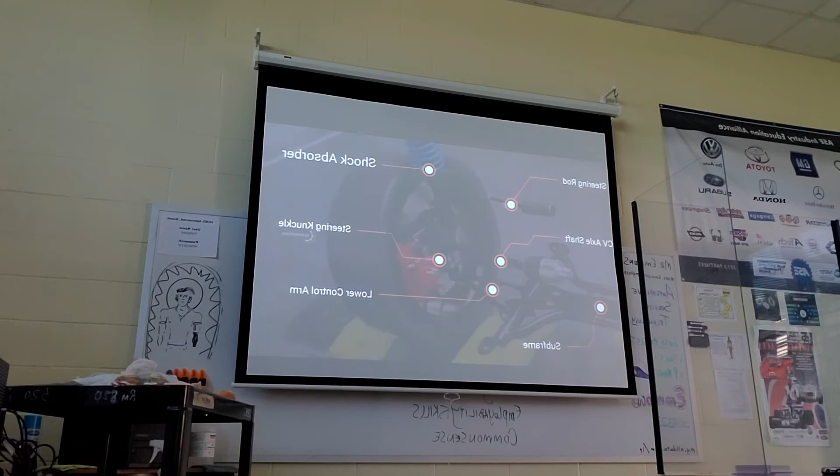When it comes to the performance of an automobile, people usually think of horsepower or the cubic capacity of an engine. But all the power delivered to the powertrain could be wasted if not handled by an efficient suspension system. The shock absorber, also known as a damper, plays a vital role in the suspension system.

All right, so you guys recognized all those parts we just talked about, right? Yes, sir. Okay. I'm going to switch this around. Looks like it's going pretty well, so. All right, hopefully that'll work.

What I want you to focus in on in this part of the video is just identify all the components that are on the bench that we've been learning about, seeing on cars. How do they work together with each other, right? So it's kind of like a brother-sister family relationship when you're talking about control arm, ball joint, knuckle, ball joint, lower control arm, or strut. Everybody's connected, right? It's like that old saying, the knee bone is connected to the, well, femur, I guess, right? All right, let's keep going.

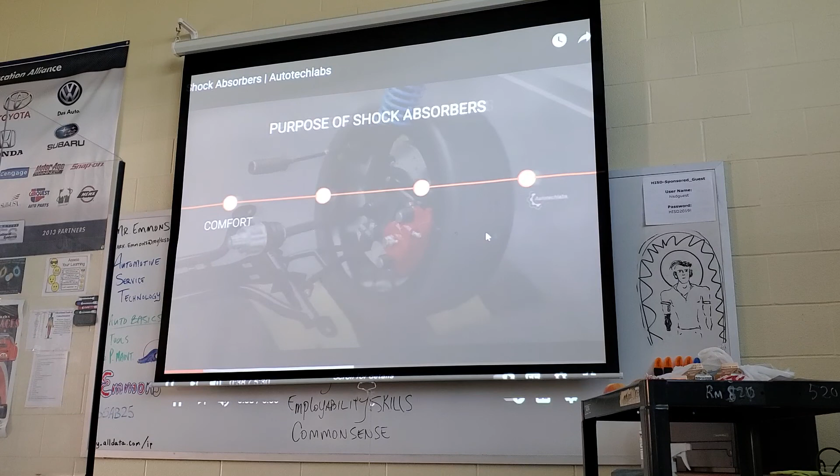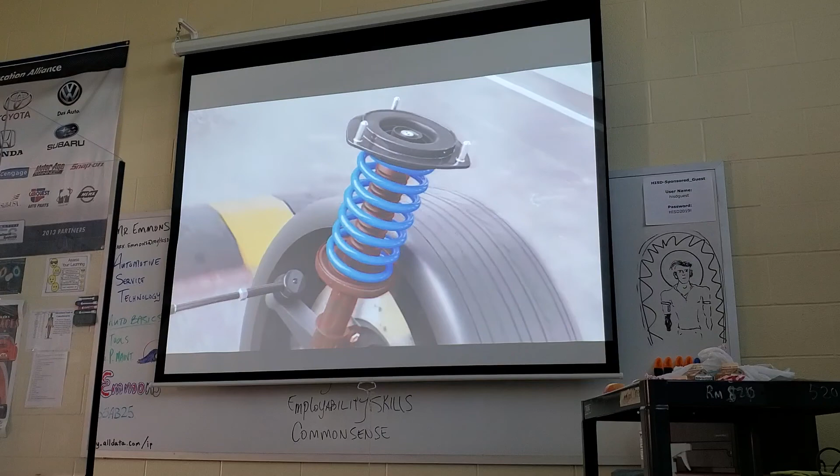Not just for providing better comfort, but it also ensures consistent traction to the road surface, better steering stability, and also improves handling of the vehicle. Technically briefing, a shock absorber is nothing but a hydraulic pump which absorbs the kinetic energy of the suspension system and dissipates it into the atmosphere as heat. Shock absorbers found in most vehicles can be strut type or conventional telescopic type.

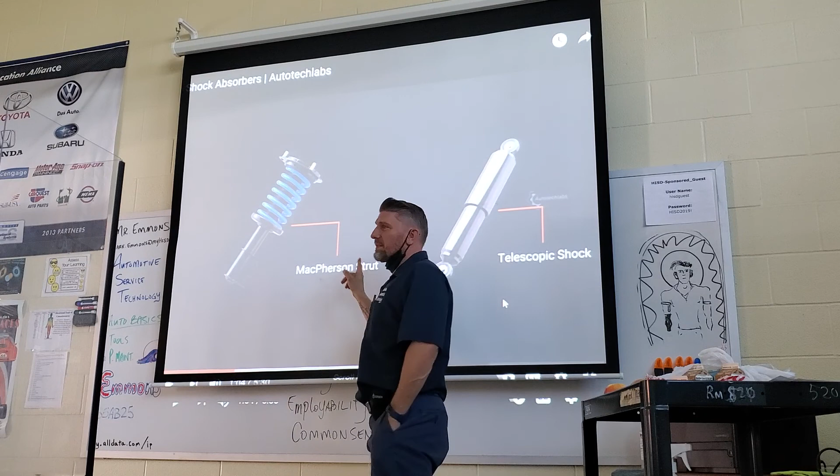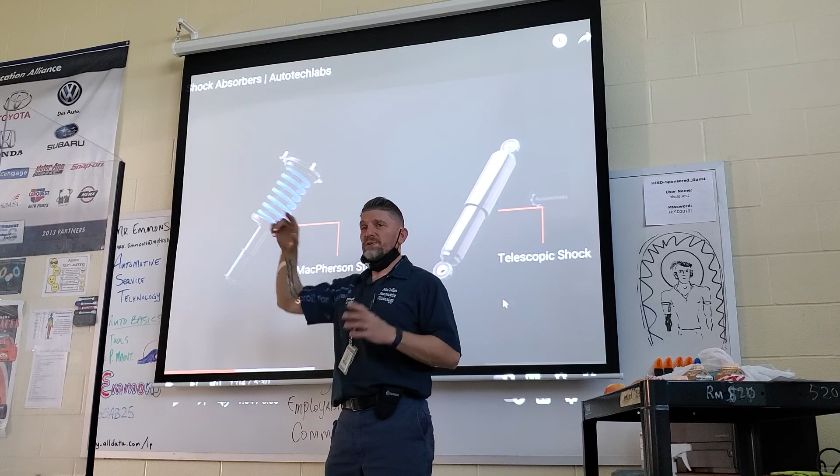All right, so just a little note here. I know that in the past we keep saying that this is a what? I've called it a strut probably 100 times with y'all. And it's on the parts list as a strut, right? It's actually called a MacPherson strut because if you remember, we had cars that were heavy, and we got underneath that Olds Cutlass the other day. We saw the full frame matches what a truck has now. We just figured out, well, we need to lighten these cars up if we want to get better gas mileage. And so front-wheel drive was born, unibody construction was born, and a lot less frame was needed.

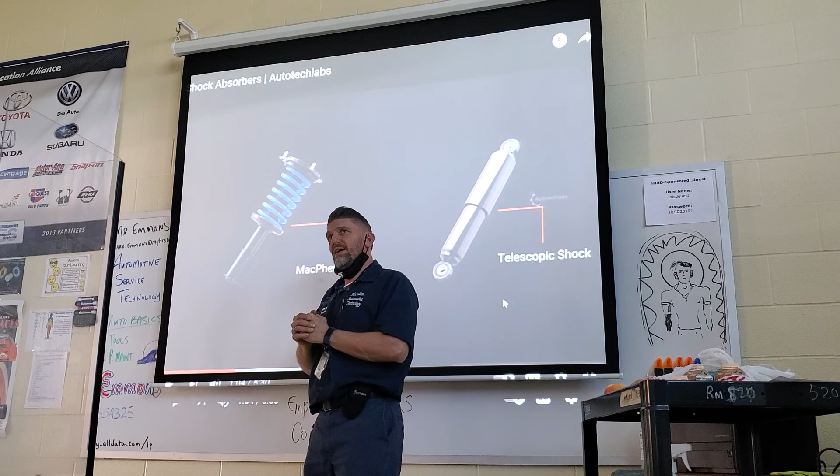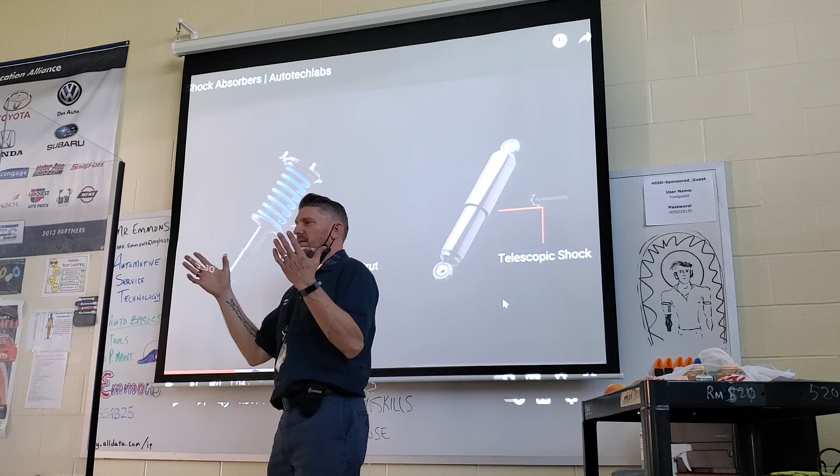But they had to figure out, again, this is probably the third time we've covered this, how am I going to run twisting force or torque to the wheel and get power to the road while there's a spring, as you saw on the Olds Cutlass, and a shock in the way. So the guy, MacPherson, decided, let's move the spring and shock up. Does the same thing, and as you can see by the illustration, the wheel was going up and down, it does exactly what the old style used to do. Now we can run a CV axle through that area that's capable of taking twisting force from the car, transmission and differential, and sending it out to the wheel.

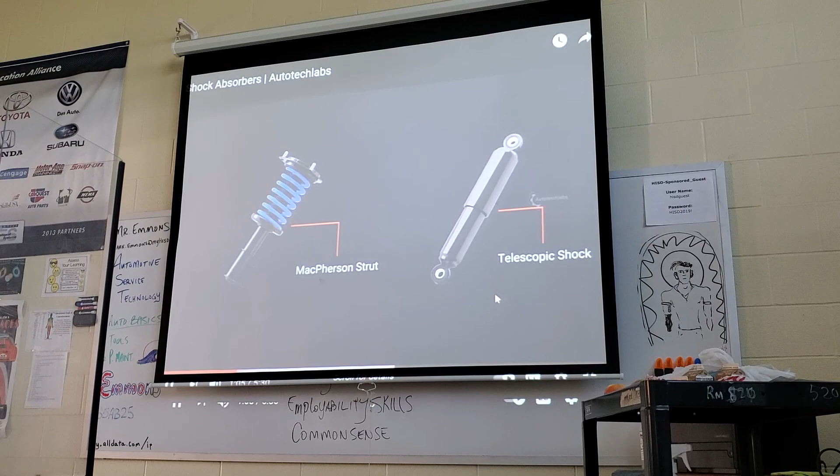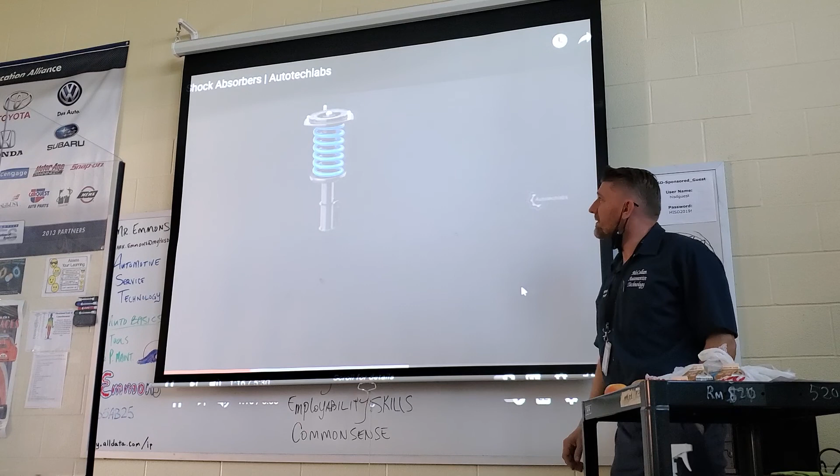Although the operating principles of both are almost the same, in this presentation, we're going to take a look at the strut type shock absorber, mostly found in the front suspension of an automobile. A strut type shock absorber is mounted between the body and the steering knuckle, with the steering knuckle connected to the lower arm.

Please look at this and understand it. Like, I need you to know subframe, lower control arm, knuckle, right? Knuckle. Strut. Or on a truck, it would be an upper A arm with a spring over here or over here. It depends. Some trucks use a strut, my truck uses what? Remember? Hello? You don't remember the spring that's used on my truck? Oh, leaf springs. In the rear, and what in the front? Rhymes with torso.

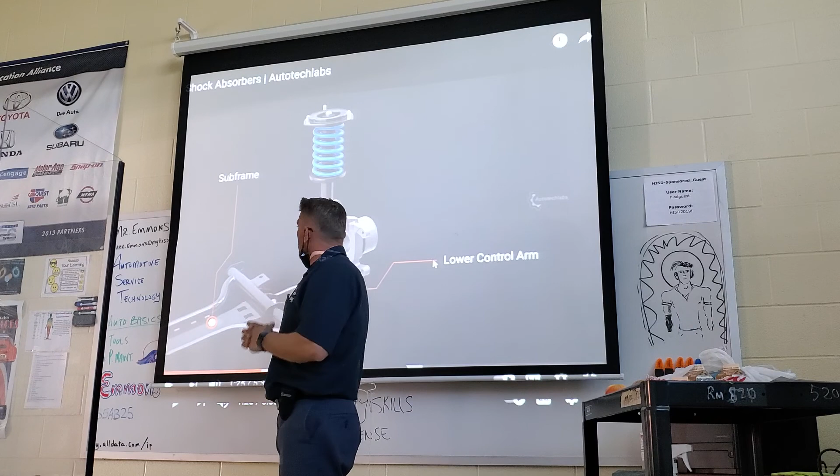Torsion bar. Very good. So at this point, we're actually going from looking at all these parts on a bench to how do they work together? How do they work at all? Like what's the function of each individual part if they were all laid on the ground and we discussed them? And how do they work together? And then what are the different types that are used and why, right?

So you wouldn't use a subframe with a strut on a truck. And I think some of you in this room could probably tell me why that's a bad idea. And you wouldn't use a leaf spring on the front as the type of spring for a suspension system. And I think some of you could probably begin to tell me why.

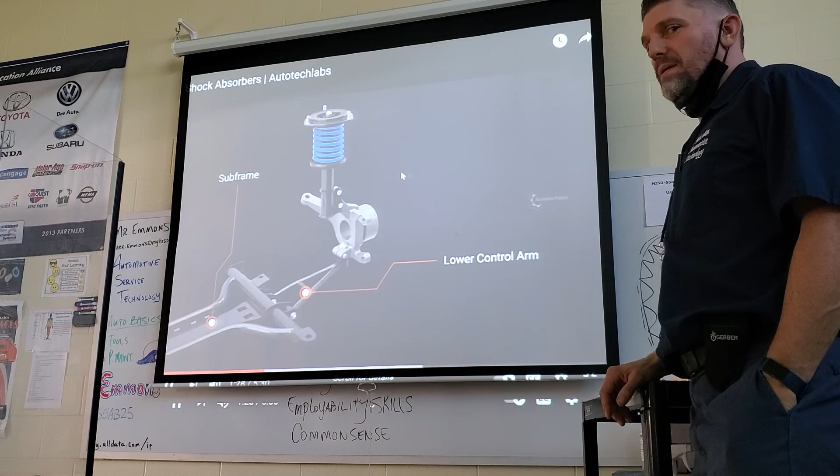What's this component right here? It's called an axle, okay? Just while we're here, I'm going to cover this, get a little advanced. This is more Auto 1-ish, but this is a steel shaft that's splined, and splines are when they take the end of the shaft and they cut straight grooves in it, and then they take a female exact copy and they slide it on, and then the two are locked forever. Yes, they slide apart, but

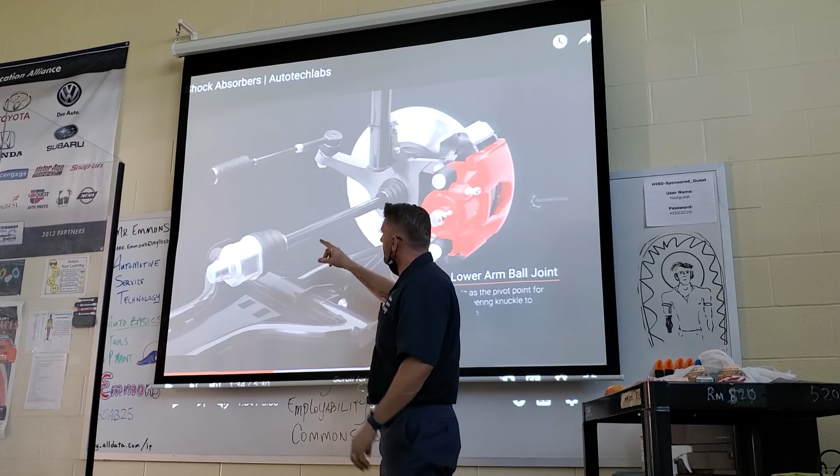this rubber corrugated boot that has these sort of expanding pyramids, inside there is a tricky system of a cage with balls and a series of ball runners that are like water slides, and it can twist and turn. It's wicked. I mean, this invention is amazing. And then this one is called a plunging joint, because all it does is a tripod. You might even be able to see 1, 2, 3, a tripod of steel circles that are in a sliding channel.

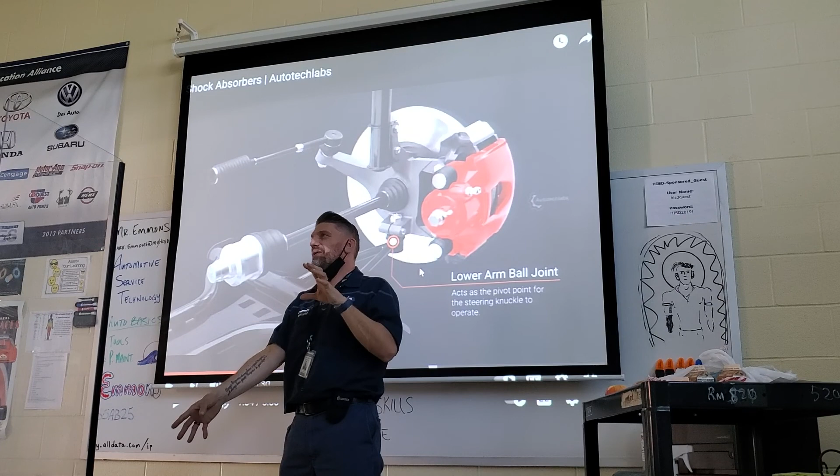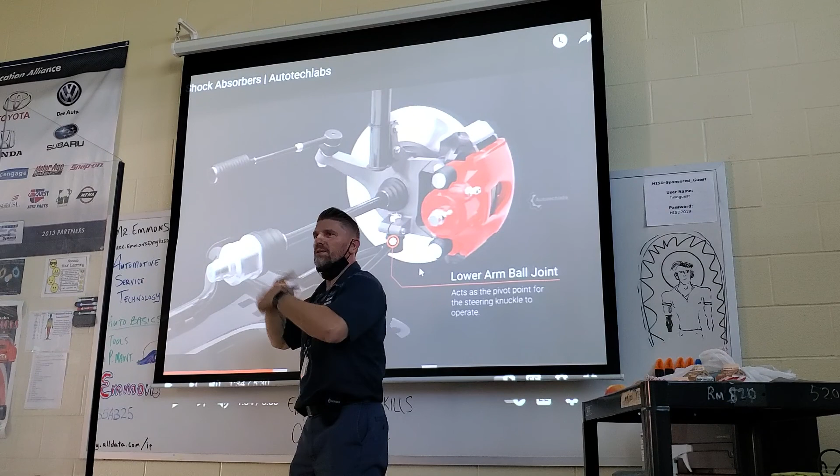So 1, 2, 3, and they can pass rotational motion or torque while the shaft goes down and up as the suspension moves, causing this to slide out and back in. So when the suspension falls into a pothole, the CV axle has to get longer, right? So inside the plunging joint, it has the ability to move forward and backward and still continue to twist and put power into that shaft, which puts power into that joint, which puts power into the wheel, because the splining I talked about earlier is happening in the hub.

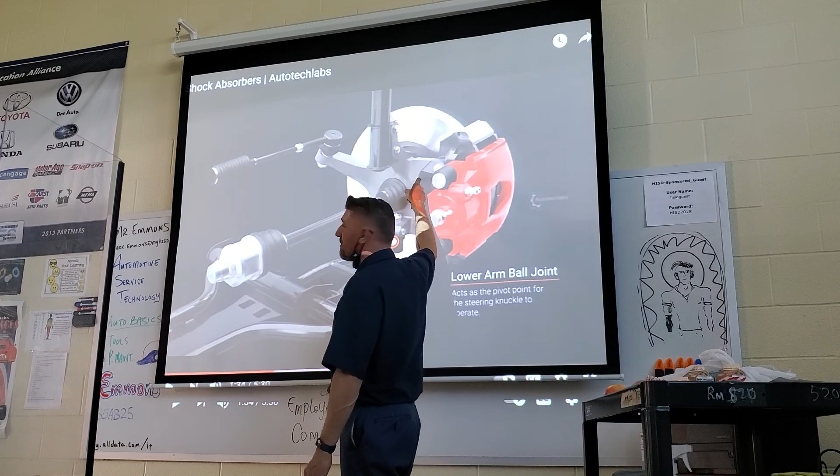So you remember the hub on the bench out there? A front-wheel drive hub is splined on the inside. So the CV axle, the part you can't see that has a stub shaft, splines into the hub, and then whatever the CV axle does, the hub is doing, because they're splined forever, right? I've never seen one of these break anywhere but right at that joint and right at that joint. Those are the weak spots. You're never going to see one of these shafts break or the splines on the tip of the axle, okay?

These are called drive axles. They're also called drive shafts, and they're also called CV axles. CV stands for constant velocity, meaning that it's capable of transferring velocity constantly, right? So we just kind of hit Auto 1 and maybe stepped a little into Auto 2 and then came back. Just a lot of information. That's not an Auto Basics conversation we just had. So if you feel like your brain's full or you're getting tired, it's probably because there's a lot of information coming your way.

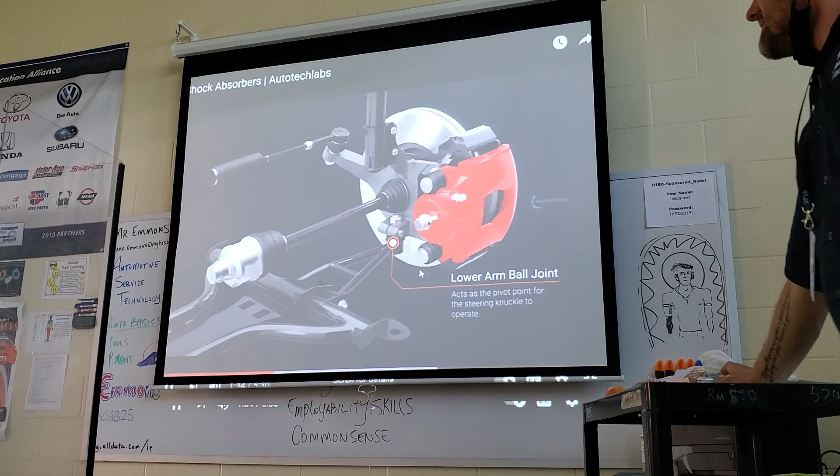All right, here we go. By the steering rack assembly. Oh, by the way, how many people have seen the ball joints video that I posted? Goss's Garage? He's good. It's pretty good. I don't have time to do a video, right? And this guy is talking about it, and you get the point, right? You understand what a ball joint probably is and how it differs from a strut.

So just so you know, wherever we need to connect a control arm to a knuckle, there has to be a ball joint, because it has to be able to move up and down, and the angle right here is not going to stay a right angle forever. It's going to do a lot of this. So it has to pivot, and it also has to turn when you turn left and right. So when this turns and goes up and down at the same time, the ball joint is taking care of all that. High wear component. This is where your money is at. You're going to replace more ball joints than any other component.

And it's a ball socket arrangement; you've seen them on the bench. You have this giant cup, and it surrounds a steel ball that's on a shaft, and that thing can move around like that. Imagine what's happening in there, right? And when the grease runs out over time, 100,000 miles or 10 years, it wears out, and all of a sudden you've got some wear in there.

Now it's the same as when you have a hip socket problem and someone has their hip replaced. It's a ball socket arrangement. The femur bone comes up into one of these, right? And so when you step on it and it goes kunk, and there's nerve endings in the way, that hurts like hell. So it's the same arrangement though. Any questions?

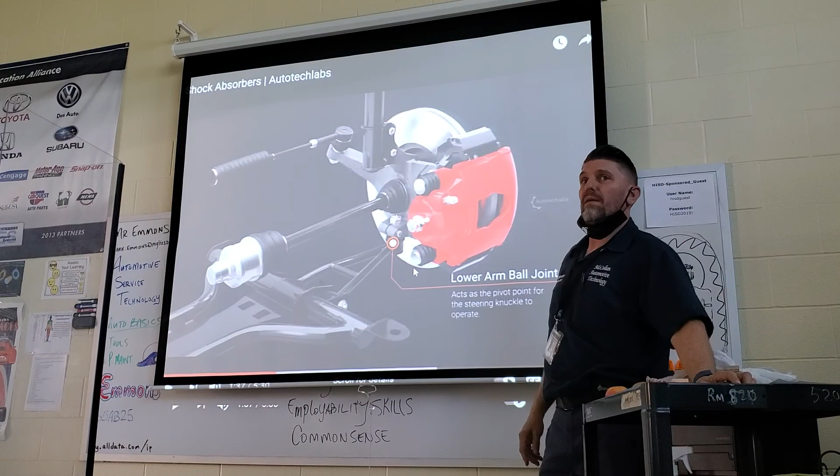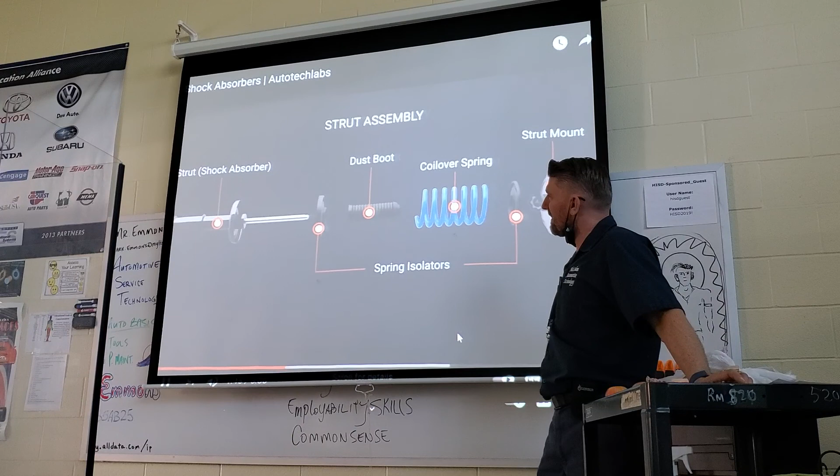All right. A strut assembly comprises a shock absorber, coilover spring, top strut mount, and a dust boot over the piston rod to prevent any contamination to the oil seals. Despite the popular belief, it's the coilover that does take the weight of the vehicle and not the shock absorber.

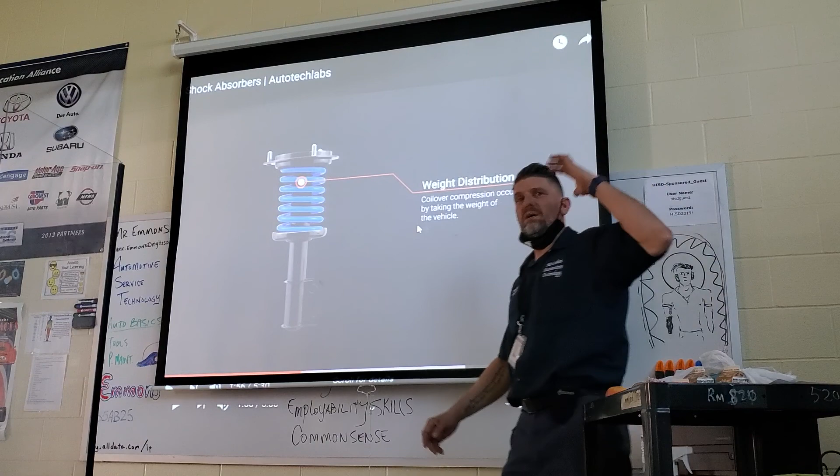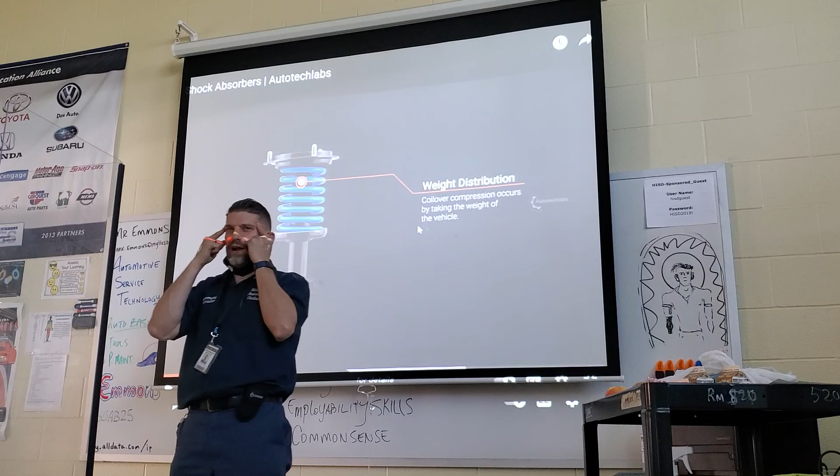Boom! Fun fact. Springs control the weight of the car. They handle the weight of the car. Nothing else. Okay? I need you to put that so far in your brain that it sprouts like a small seed and then begins to blossom when spring comes. Okay? The springs hold the whole car. You ever seen a car that's sagging one side, the other, or back and front? It's the springs.

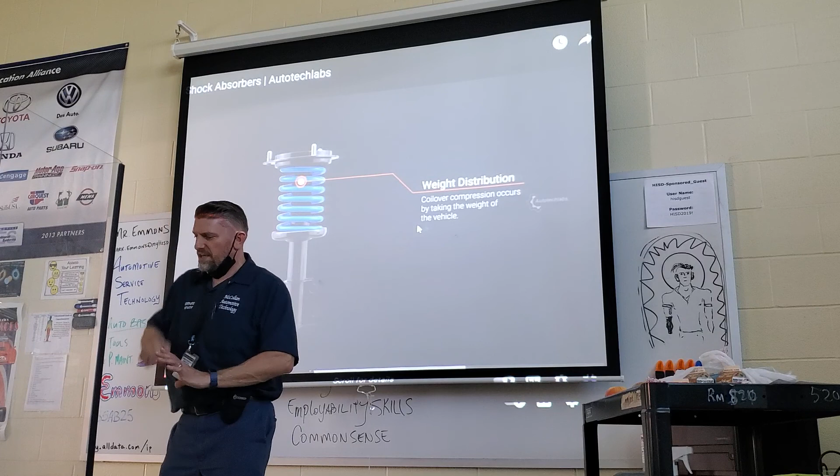People think, oh, I need to get new struts or shock absorber. No. The only thing a shock absorber or a strut does is limit this travel. That's it. It doesn't push up and say, I've got this. That's what the spring does. So if you see a truck and it's doing this and it's not supposed to, it's either got too much weight in the back or the springs are worn out.

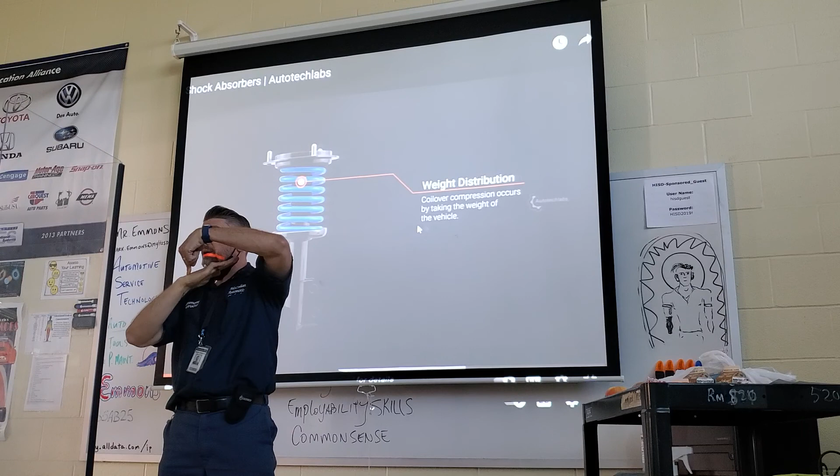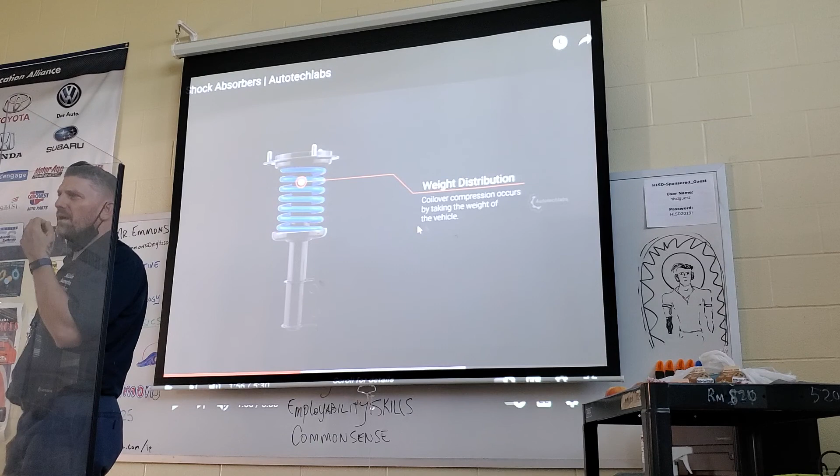Pull this down, I can't hear you. No, I was gonna ask that too. You said that the cars with hydraulics?

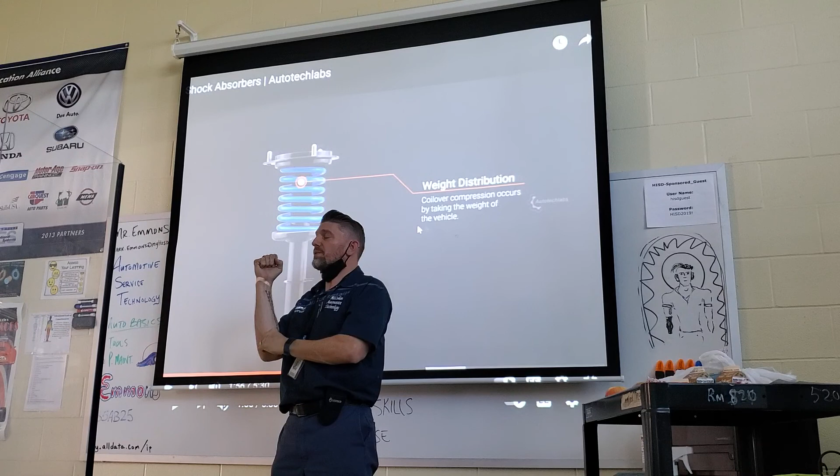Yeah. So you take the spring and strut out, and you put hydraulic rams. Hydraulics literally means liquid. Okay, you can put a car on airbags, but you can barely see the movement. The cool thing about airbags is that you can drop a car down at will. I have a friend who has a beautiful BMW, she put airbags on this thing, and it's remote control with her phone. And she can drop that thing so low that you can't move the car. It's a security system, right?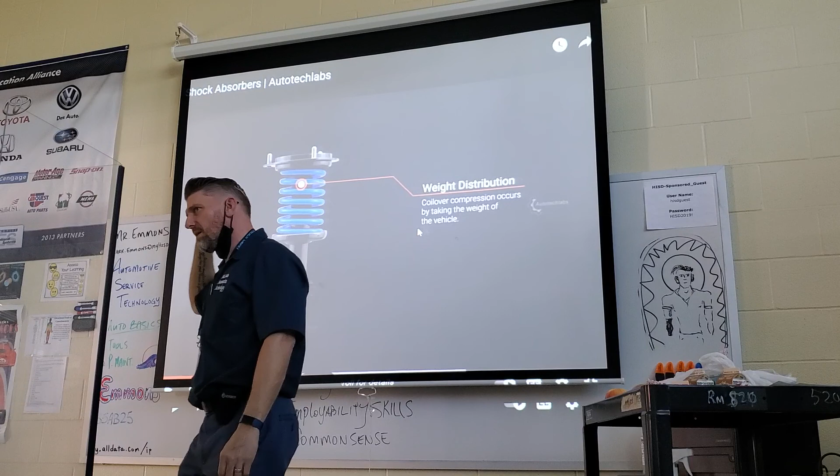Looks cool too, but hydraulics, it's like a shock with a motor and a line coming from that motor that pumps fluid here and shoves it in here, and there's a piston, and it can go up like boom. You can move a foot of vertical travel from this rod that we're about to check out. With hydraulics, is there still springs or no? Springs? Yeah, like those. You have to have some form of spring. Let's watch a video on hydraulics after this.

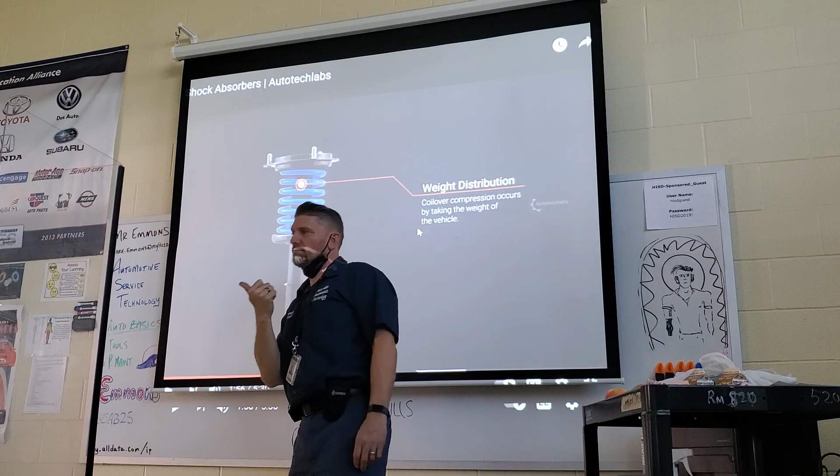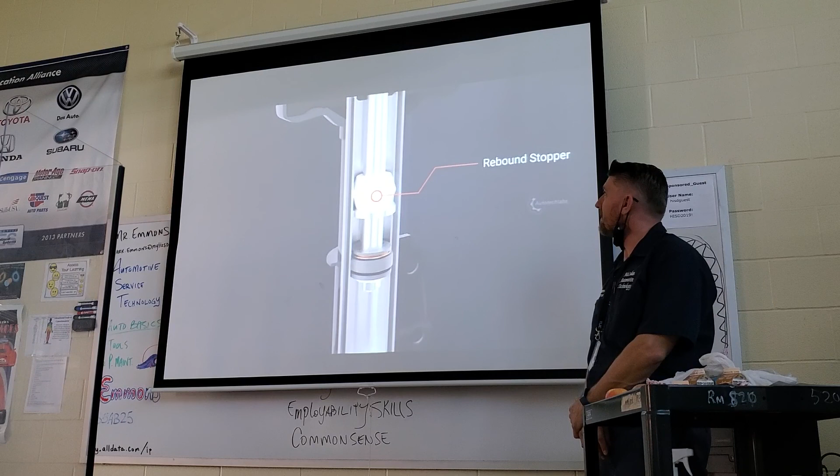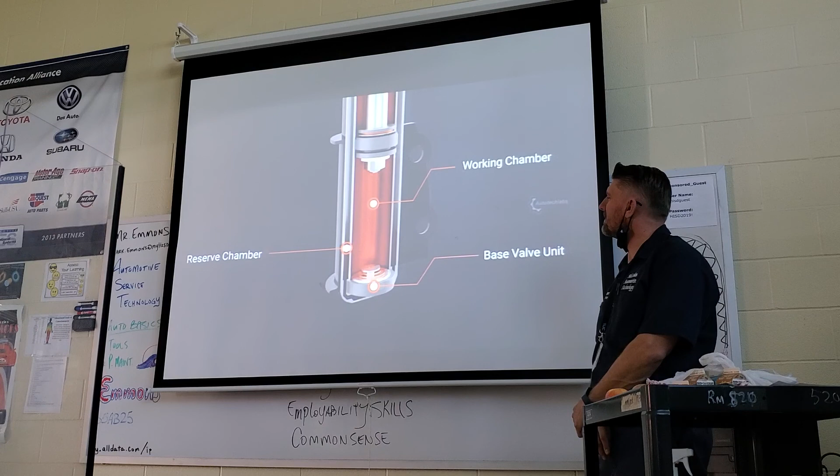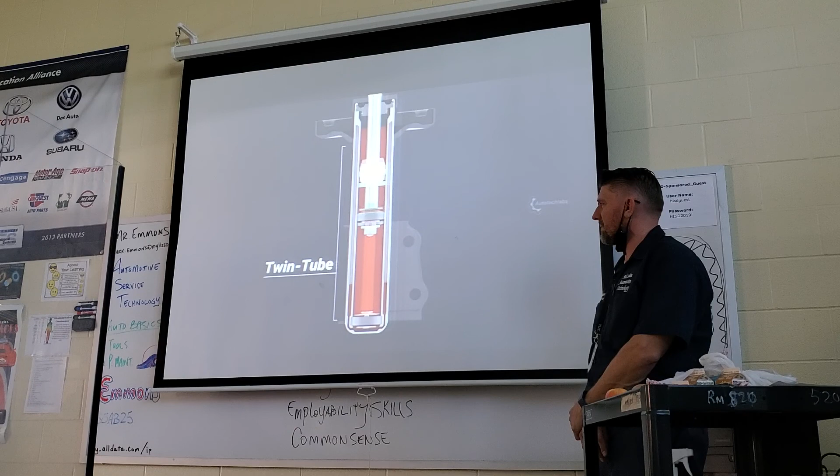The strut housing includes a piston rod, which moves up and down, a rebound stopper, a piston valve unit, a base valve unit, and the hydraulic fluid. The shock absorber is designed to have a working chamber and a reserve chamber. The hydraulic fluid transfer between these chambers is controlled by the base compression valve. Such a configuration using two chambers is known as a twin-tube shock absorber, although other variants such as the monotube shock absorber, which uses a single chamber, are also present in the industry.

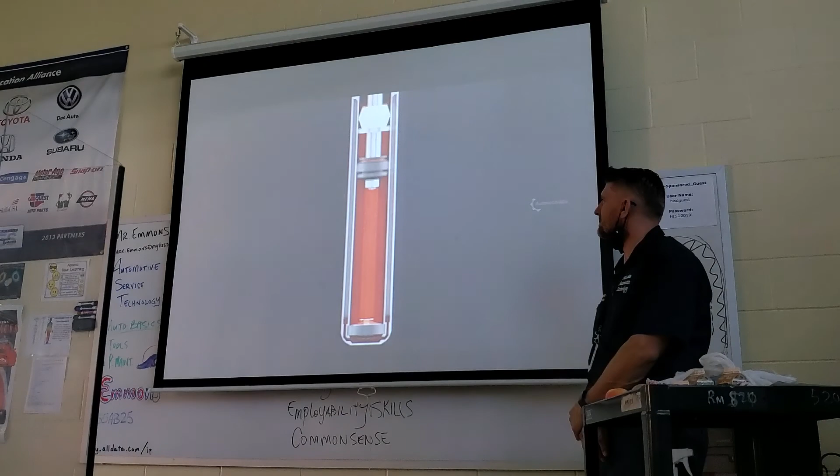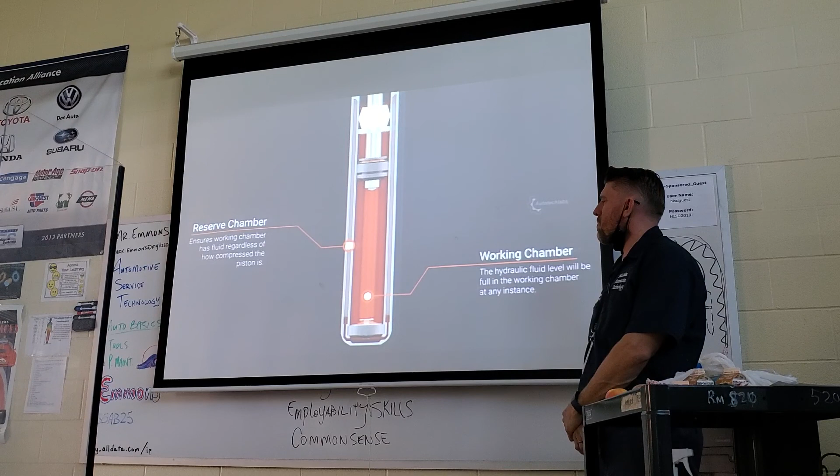For the shock absorber to provide its optimum performance, the working chamber must be full of fluid at all times. The purpose of the reserve chamber is to ensure that the working chamber is filled with fluid, regardless of how compressed the piston is. Thus, the reserve chamber will always be partially filled. The system is added with liquid nitrogen while manufacturing, which expands and acts as a compressed gas on the remaining volume of the reserve chamber.

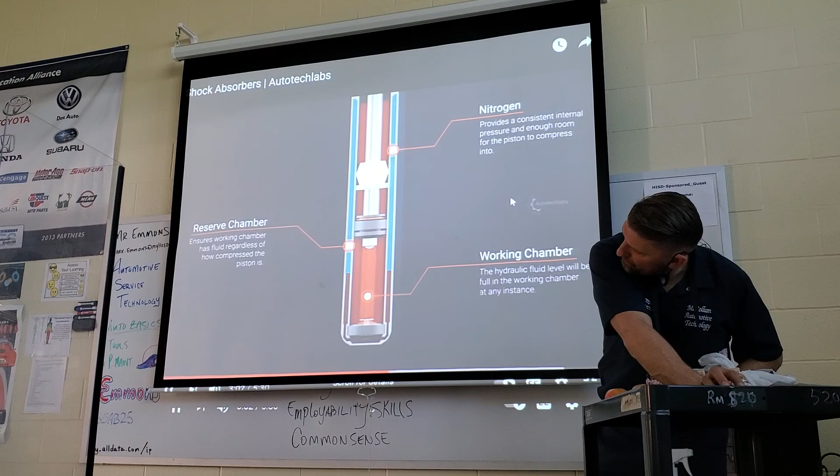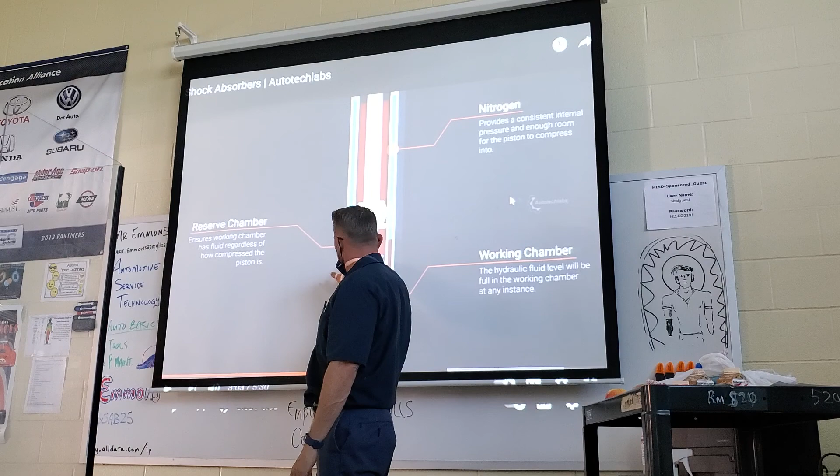All right, so he's about to say this, but I just wanted to steal his thunder a little bit because he's a computer and I'm not. They add nitrogen gas here to push down here on the fluid. And when you push on fluid, it does not compress, but it can raise the pressure in this area, okay? In other words, it doesn't get smaller. Like air you can compress.

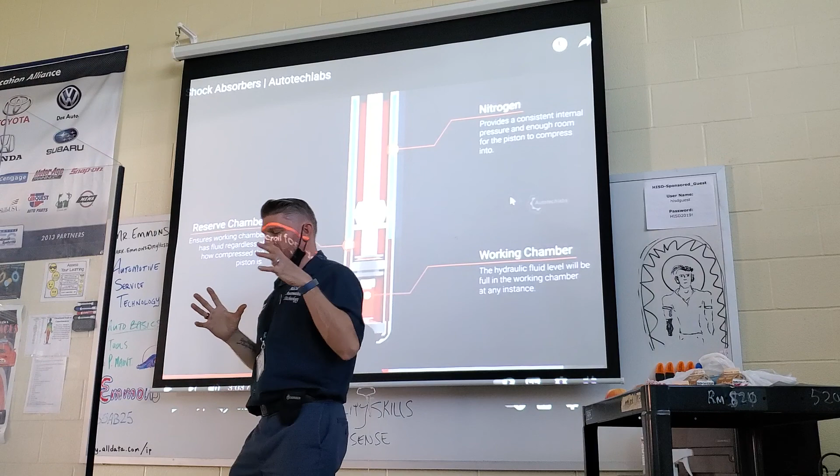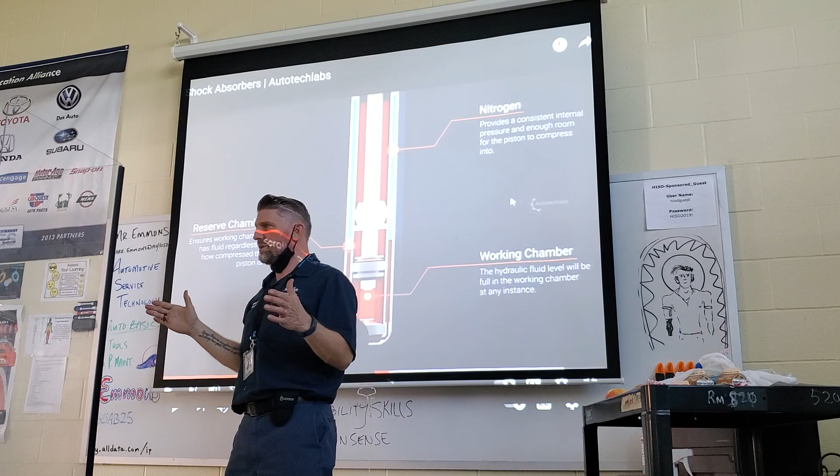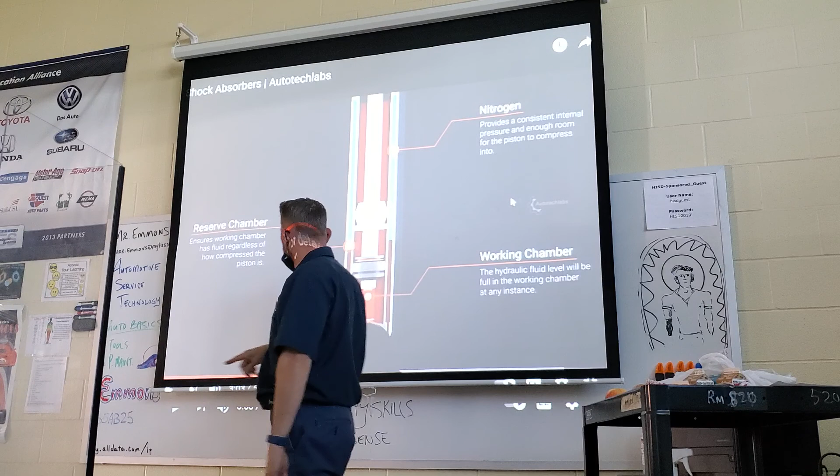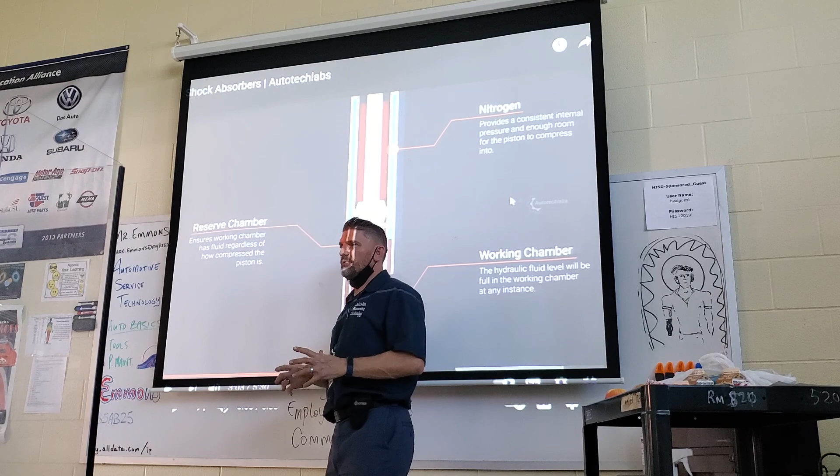You can take a closet full of air and put it in a dive tank. If you ever see a diver carrying around a tank on his back, generically that's about a closet full of air. Okay, how did he get it all so small? You can compress the gas. You cannot compress a liquid of any kind on this planet. It's physics, okay? But you can put pressure against liquid and cause it to be under pressure. When you do that to a shock, it keeps it from aerating. Aeration is what happens to a motorboat behind the boat. You see that white water?

Okay, or when you go like this really fast and you see bubbles and stuff like that in the water, it's aeration. You took some air out of the water, or you added air from up here that was above the water into the water. When this experiences aeration, it cuts right through the air and bottoms out really fast because air doesn't slow down a ram like that, but liquid does. So aeration is bad. That's why they put nitrogen in there to pressurize the fluid and raise the level it would take to create aeration or even boiling.

Good. Learning so much today. Oops, sorry.

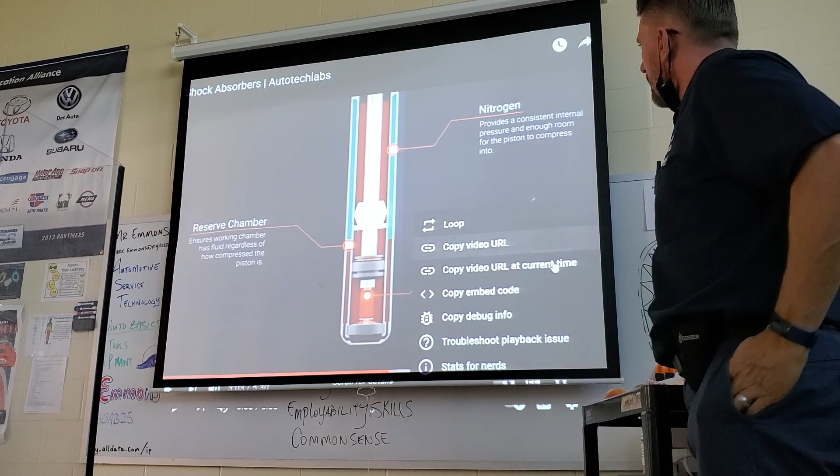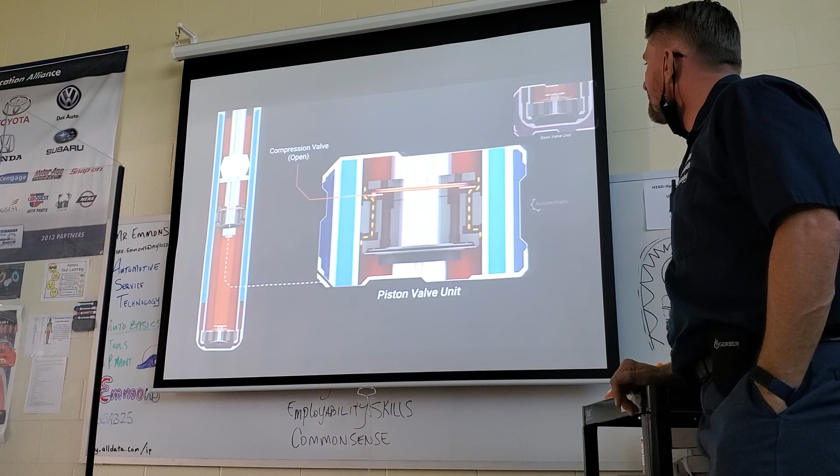The calibrated valve at the base controls the resistance experienced by the piston during the compression phase, while the fluid flows almost freely from base to top through the piston valve. As the piston moves towards the base, the compression valve opens in a controlled manner, allowing the excess fluid to flow to the reserve chamber.

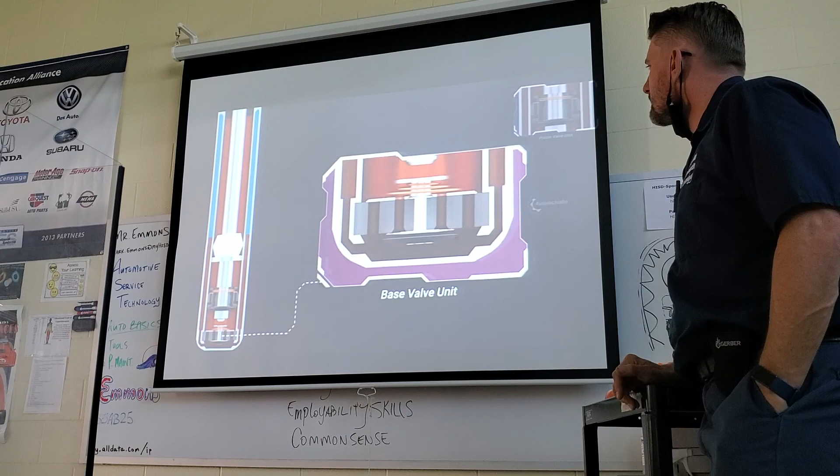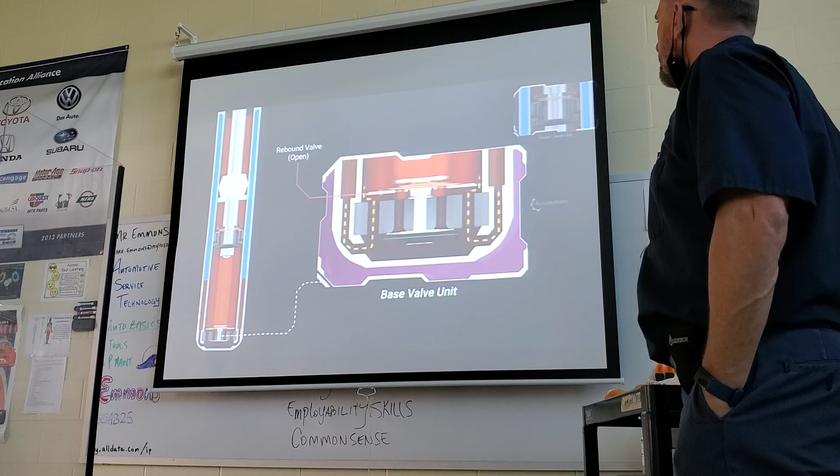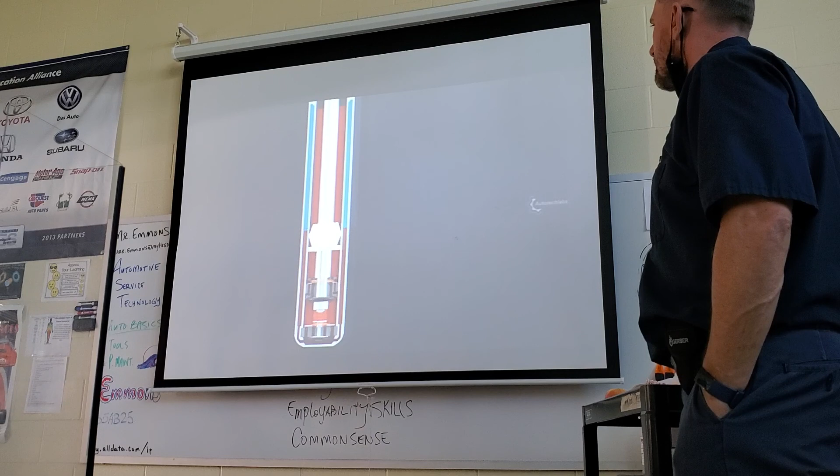During the rebound phase, the piston rod tries to restore its position against the compressive energy, and the rebound valve ensures this happens in a controlled manner. As a result, the previously displaced fluid to the reserve chamber is pulled back to the working chamber. The repeating action absorbs the energy from the suspension system and transfers its heat to the atmosphere.

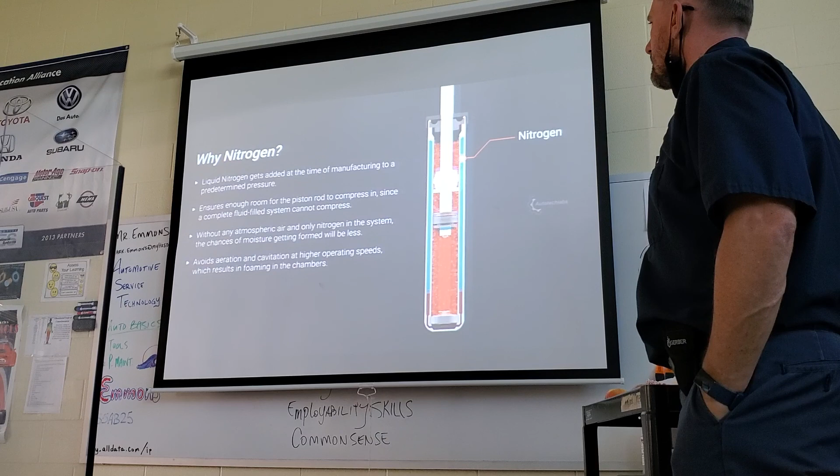With the pressurized gas added into the reserve chamber, the system avoids the phenomenon of generating air bubbles in the fluid, known as cavitation or foaming. Damage to the oil seal can cause fluid leaks, resulting in foaming and inconsistent shock absorber performance.

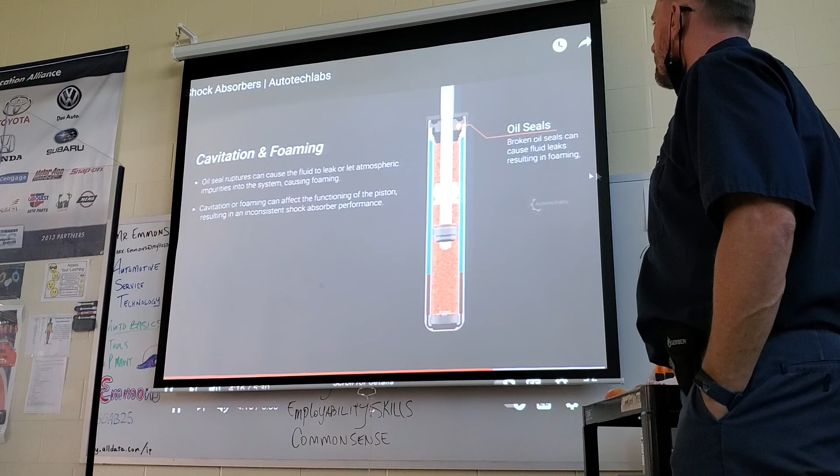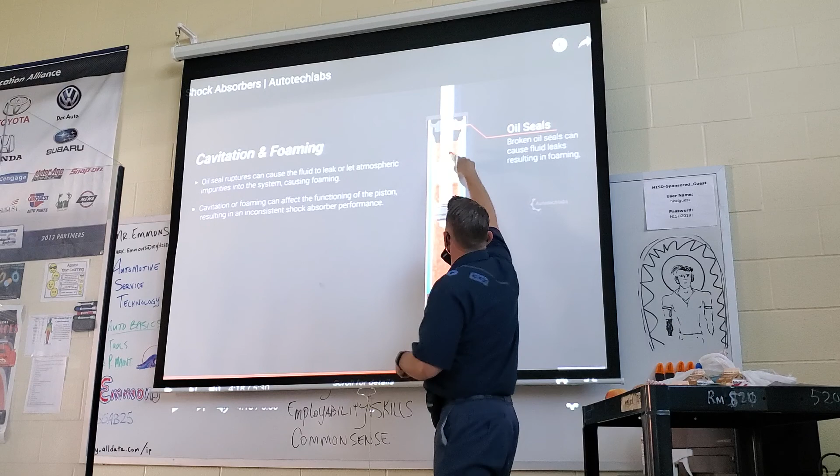So there's your first lesson in diagnosing a shock. When that seal on top, shock or strut, goes bad, you'll see leakage coming out and running down. If you see a shock and you see liquid dripping out of it like it's bleeding, right? Gravity will pull it all the way down here, so you're going to get your drip down here.

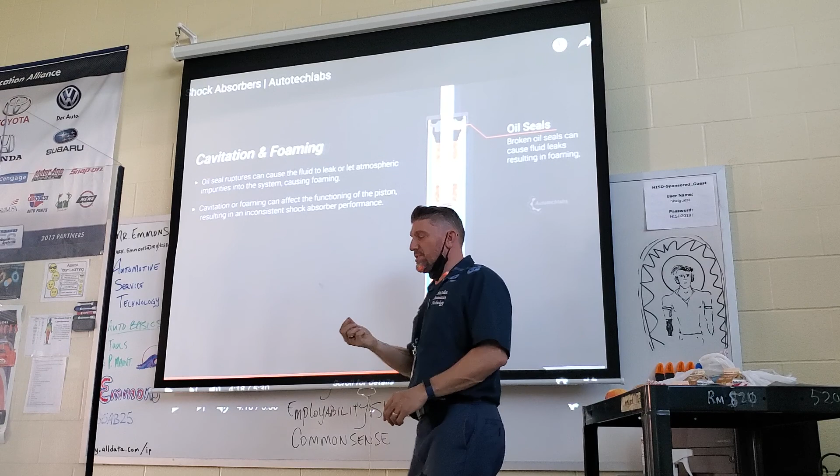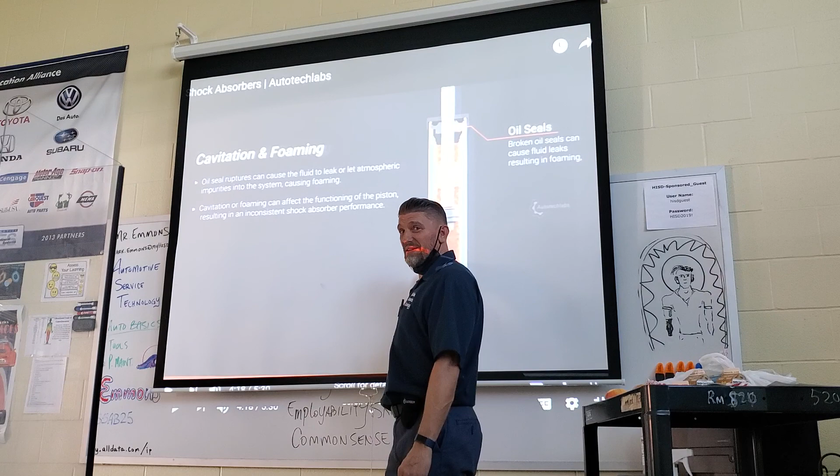And you check it out and you realize that's shock fluid, not engine oil, because sometimes things that are near it can leak on it. You have to be able to decipher, is this engine oil or is this shock fluid? And that's easy to do because I want you to start smelling every fluid, and this stuff stinks pretty bad.

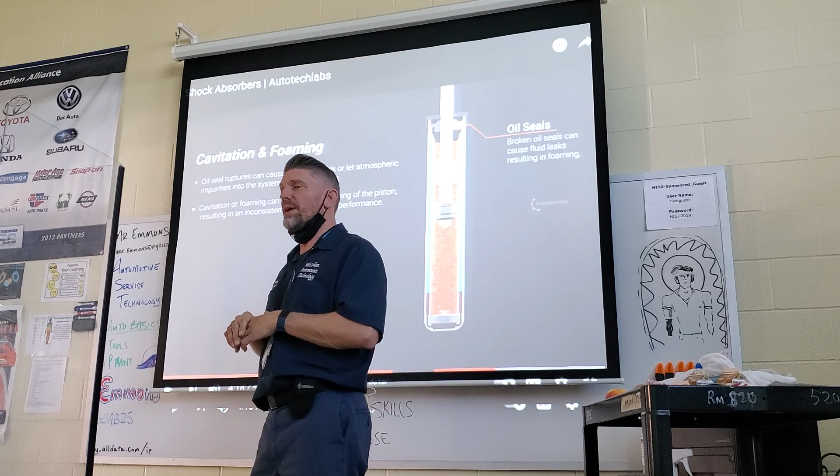All right, so once you're at a point where you're looking at a shock, the first thing you're going to do is check it for jounce and rebound, and I'm going to show you that out there, and then you're going to check it for leaks. Okay, those are the two really important tests you can do to your shocks and struts.

The other one is just looking at, Chris, focus, stand up.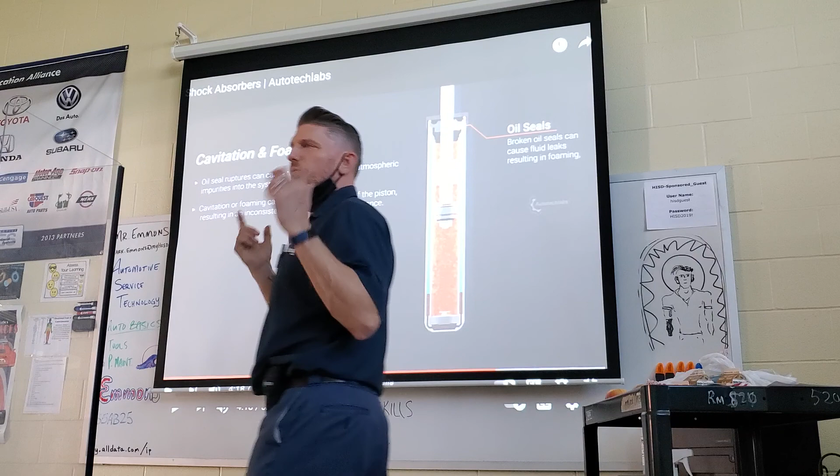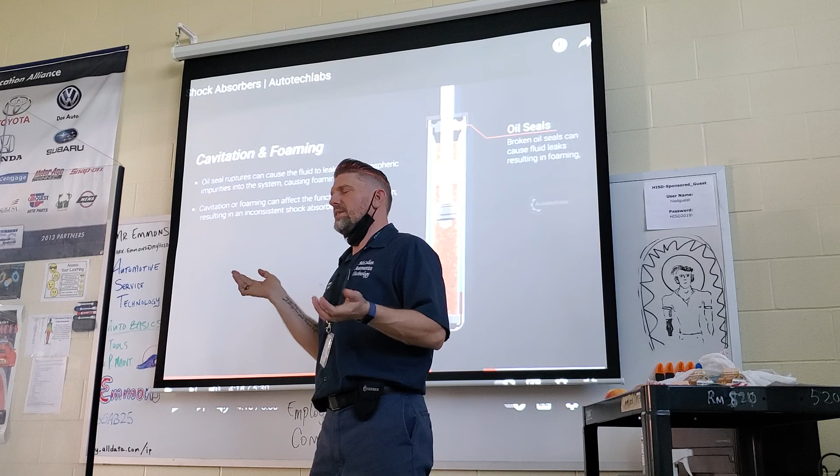The other one is just look at the mileage of the car, right? If your customer comes in, or your mom, or your wife, or maybe it's just a buddy, if you're giving someone advice about their car, you're the professional now, okay? You're the doctor. If you get a Mazda 323 in here, or a Mazda 6, and it's got 110,000 miles and it's never had struts done, guess what? It needs struts. And you don't do one, you do either two, the right front and the left front,

or you do four. Yeah, and I recommend four, because anytime you've got something that controls the up and down movement of the wheel, and you've got two in the back that are old, and they're kind of doing some of this, and the ones up front are new, and they're kind of doing this, you're going to get your car doing some weird stuff, and that could be dangerous for the customer. Okay? So go for four. Get that fourth finger up there.

And that goes for everything suspension related. If you're going to do something to the left, try to do it to the right. Brakes, too. Okay, left and right. You don't do one brake caliper. That's not good. I mean, I've seen a lot of people do that, but it's not safe. As long as you're the one that's not on the work order, and they can't come back and sue you.

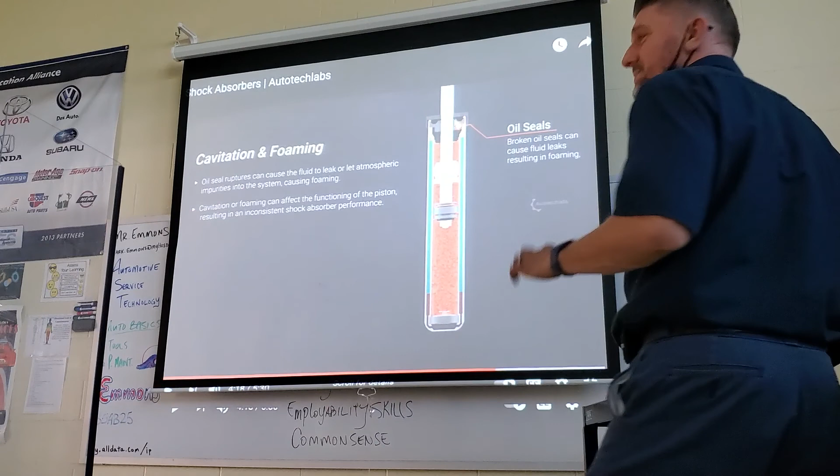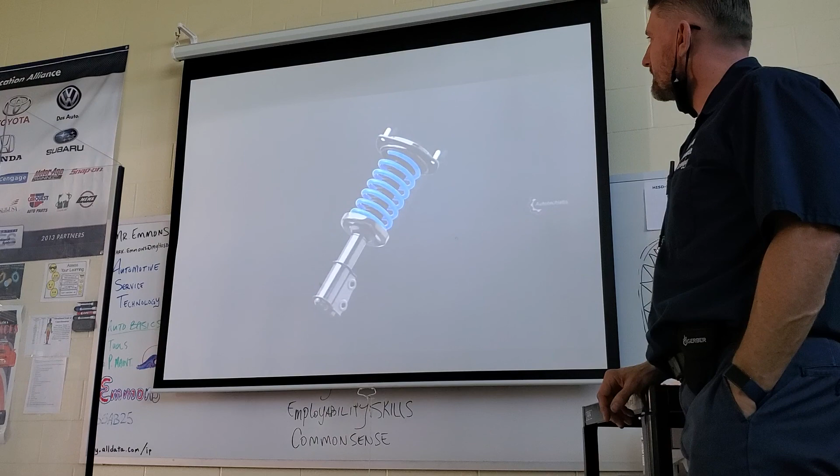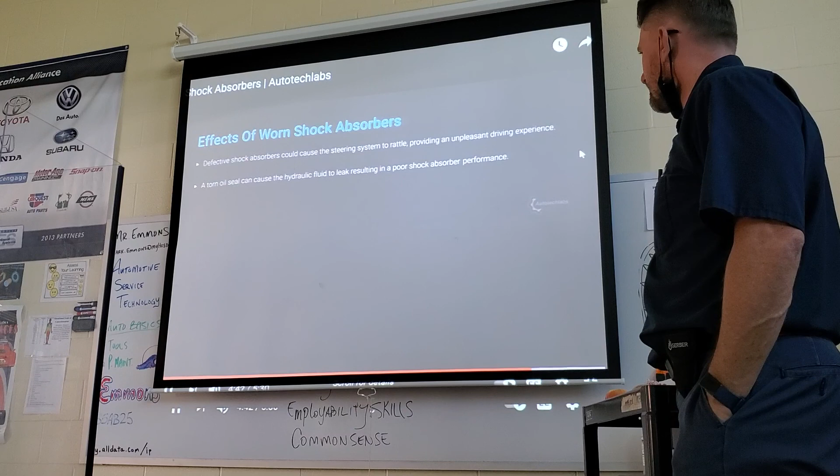Shock absorbers can usually last up to several thousand miles, but they do get defective over time due to the millions of operation cycles they have to endure. Defective shock absorbers could cause the steering system to rattle, providing an unpleasant driving experience. A torn oil seal can cause the hydraulic fluid to leak, resulting in a poor shock absorber performance.

Uncontrolled piston movement due to worn valves or seals can affect the traction to the road surface, resulting in increased braking distance. With worn shock absorbers, the steering system could swerve your vehicle hard off the road, even with the slightest movements. True. A worn rubber insulator inside a shock absorber mount could create a clunking noise when you drive over uneven surfaces.

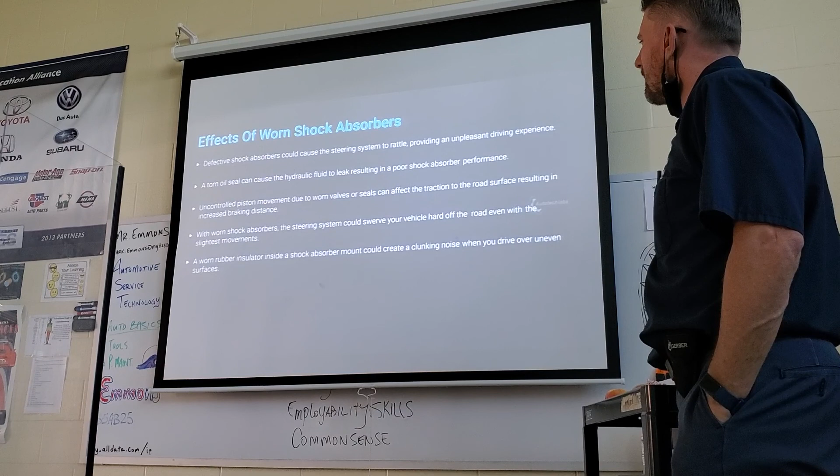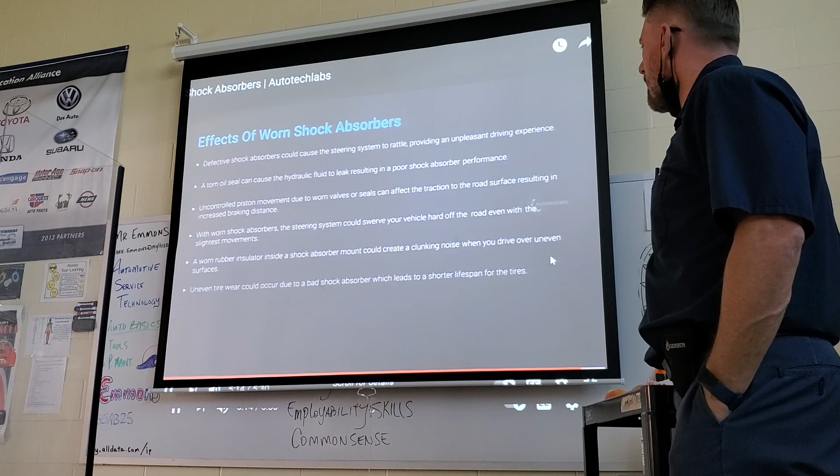Uneven tire wear could occur due to a bad shock absorber, which leads to a shorter lifespan for the tires. A failing shock absorber is best inspected at the earliest and should be replaced as required for the efficient. All right, so that's the video.

Let me quickly turn this off and